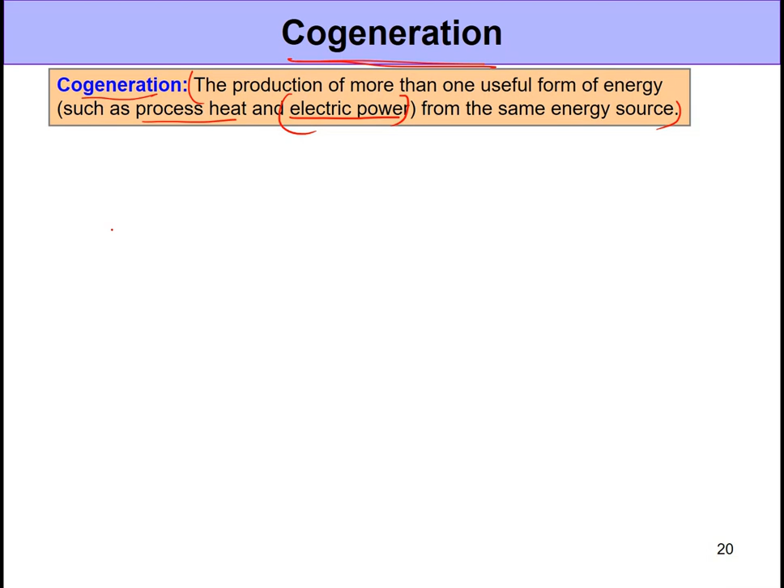So the outputs from the cycle that we're talking about are two: electric power or electricity plus heat, and it's certainly coming from the same energy source. Now, why do we care about that? Let's have a look. If you consider a lot of industries that are around us, a lot of them require energy in the form of heat as well, in addition to, of course, electricity requirements. This is called process heat, simply because it's needed for certain chemical processes, right? Certain food processes as well.

So when you talk about the conditions of the process heat that's used in these industries, it's typically in the range of 150 to 200 degrees Celsius and between 5 to 7 atmospheric pressure. So low to medium temperatures, not very high temperatures. Now, the way the heat is produced in all these industries is actually by burning fuel. Okay, so you're burning fuel, and all you're doing is just producing steam at rather low temperature and using it.

And this is what's done, but it's not a very smart way of using your fuel, right? Because the fuel can burn at 1500 K or even higher, and all you're doing is to heat up water to about 473 K and use it for heating purposes, not anything else. So it's not a very efficient way of making use of the resource, nor is the temperature between the source and the application well matched.

So there could be better options, but yes, a lot of industries still do this because, well, it's a cheaper option. Why not? So now the question is, how can we make this entire thing better from the exergy point of view and also from the economics point of view? It turns out that a lot of industries that require huge amounts of process heat also require large amounts of electric power.

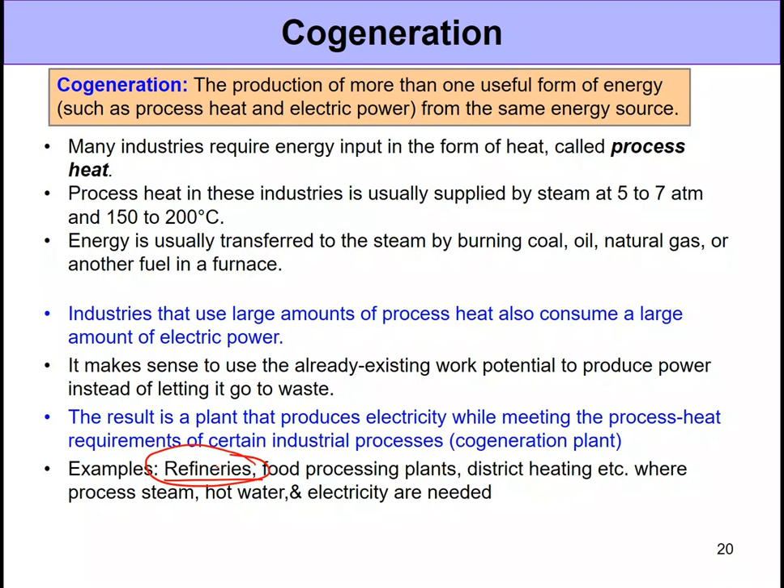Now, when we talk about the industries that fit into this definition of requiring a lot of process heat as well as consuming large amounts of electric power, the industries that come to mind are a lot. Refineries, for one, are one such industry where they're using lots of process heat and lots of electric power. It's for this reason that a lot of Aramco refineries have their own power plant, right? They don't take power from Saudi Electricity Company. They have their own power plant because it's needed for running the refinery itself, and it makes a lot of sense there.

And refineries also need a lot of process heat. They need a lot of steam at these temperatures, 150 to 200 degrees Celsius, for performing a lot of chemical reactions that are needed to improve the fuel or to transform the fuel into the chemicals that are needed, right? Some of you will surely end up in Aramco for your co-op or your summer project, and when you go there, you'll be seeing how they make use of process steam or this process heat in a lot of different chemical processes, right?

Apart from refineries, food processing plants, such as the ones that Almarai has or any other company has, these make use of the process heat. So they don't have their own power plant, but they can have smaller power plants that can provide heat as well. The other option would be district heating, but essentially the point is any place you need hot water plus electricity, this sort of application makes sense.

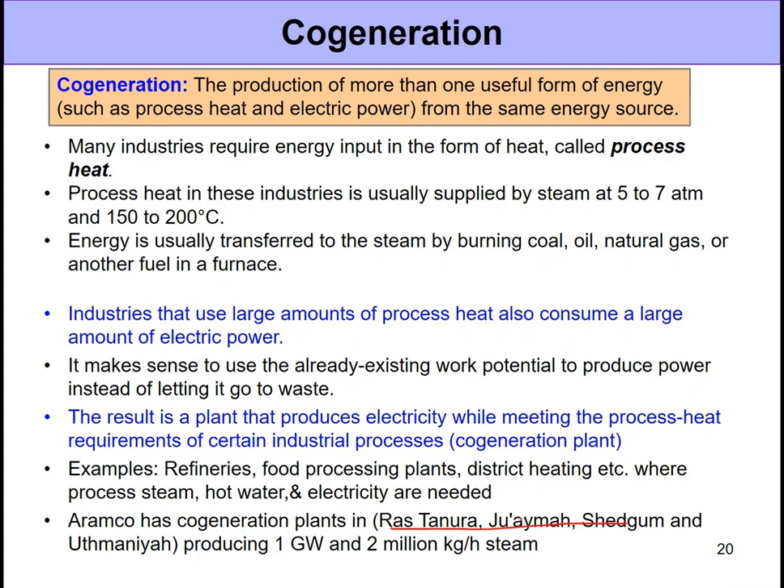Now, to give you more specific examples closer to home, Aramco has more than 3 cogeneration plants within the eastern province. So these are the locations: Ras Tanura, Ju'aymah, Uthmaniyah and Shedgum. And these power plants are actually producing 1 gigawatt power plus 2 million kilogram per hour of steam, right? Pretty huge quantity of steam. And they're using all of this for their chemical reactions, right?

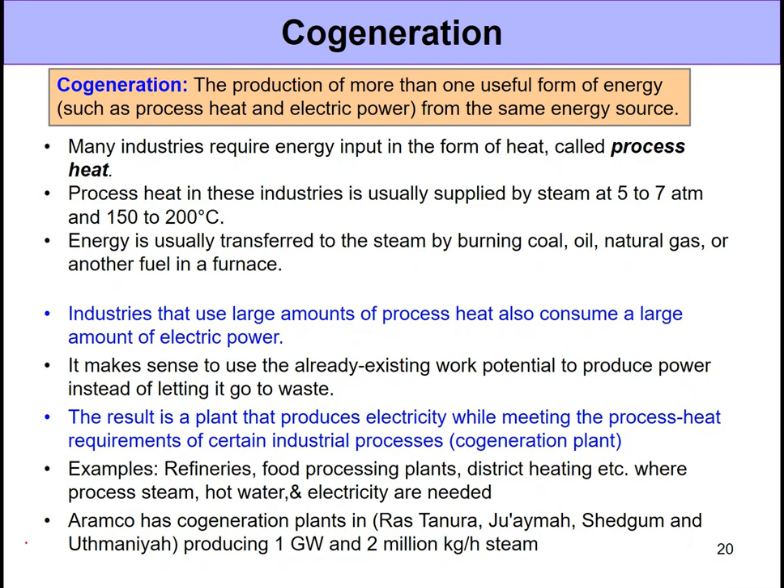We're producing millions of barrels of oil, so certainly you need an equivalent amount of water for producing the stuff. So yes, this is not something that we are just talking about in theory. It's something that's actually there, and it makes a lot of sense from the energy utilization point of view. Now that we have talked a lot about what is there, how it works, and so on, let's look at its schematic and understand what's exactly happening.

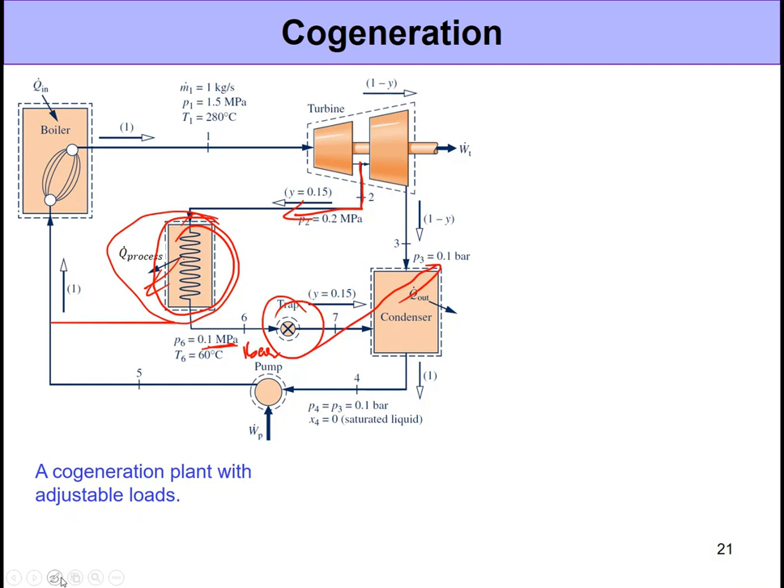Okay, so this is a very flexible operation, right? Depending on what you need, you can play around with the flow rates that you send. So let's say you have certain times when you need a lot of process heat. So instead of sending anything to the second stage, we send everything to the heat exchanger for providing the process heat. That is, we can make y equal to 1.

Now this is one of the common ways in which you're doing it, but you can also have a valve here to send it directly to the heat exchanger without sending it through the turbine, right? Although not commonly used, because it always makes sense to extract some amount of power within the turbine, but you could do that if you want, if the process heat requirement is very high.

Okay, so when you don't send anything through the second stage turbine and send everything through this process heater and let it expand, you're not rejecting any heat in the condenser because you're sort of bypassing the condenser, right? And it's a very efficient way of using the exergy available.

There is another option where sometimes we may not be requiring a lot of process heat, right? It happens from time to time in a given day where your process is done and you don't need process heat for a certain period of time. So there, instead of just sending it through this heat exchanger and wasting the energy, you could just make y equal to 0 and send everything to the second stage turbine and expand it, just like you do in a typical power plant. So multiple options, multiple ways in which you can do it, but essentially it's a very simple concept here.

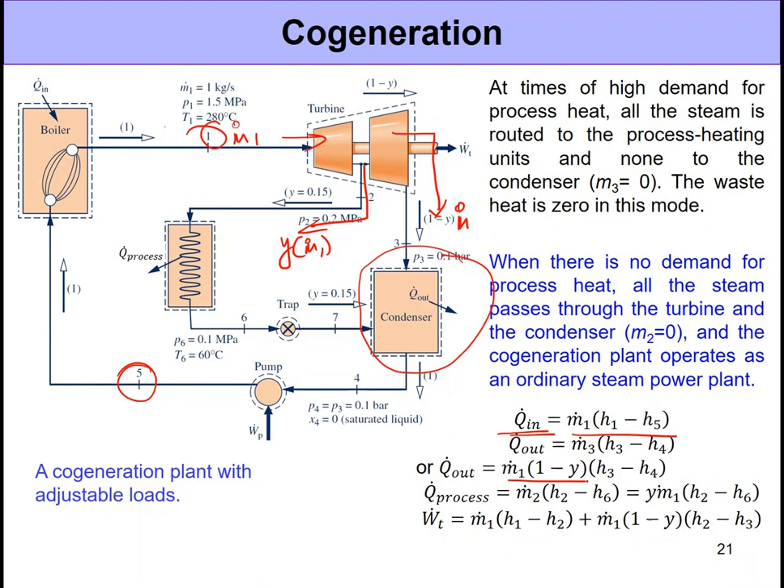Heat output, well, when it's happening within the condenser, we need to be careful about the mass flow rate because it's different. It depends on y. Y could be 0 as well, but depends on y. Okay, so it's m dot 1 times 1 minus y times h3 minus h4. So the difference in enthalpy across the inlet and exit of the condenser, and the mass flow rate associated with it.

Now, the process heat, right? The process heat is simply the mass flow rate associated with it, which is y times m dot 1, times h2 minus h6. And the work done for the turbine would simply be broken down into two: m dot 1 for the first stage and m dot 1 times 1 minus y for the second stage. So as long as you're careful about this, it's a pretty straightforward thing. There's no problem here. All right, questions.

This thing is there in your homework as well, so you might as well ask questions if something is not clear because you have to use this. Okay, no questions. All right, then let's move forward.

Doctor, if it's not ideal, do we use 1 minus y? You mean if it's non-ideal? The expansion within the turbine? The whole process. No. Whether it's ideal or non-ideal, it does not really matter. We will keep using y and 1 minus y. If it's non-ideal, the only thing that will change is the enthalpies at the exit of the turbine, right?

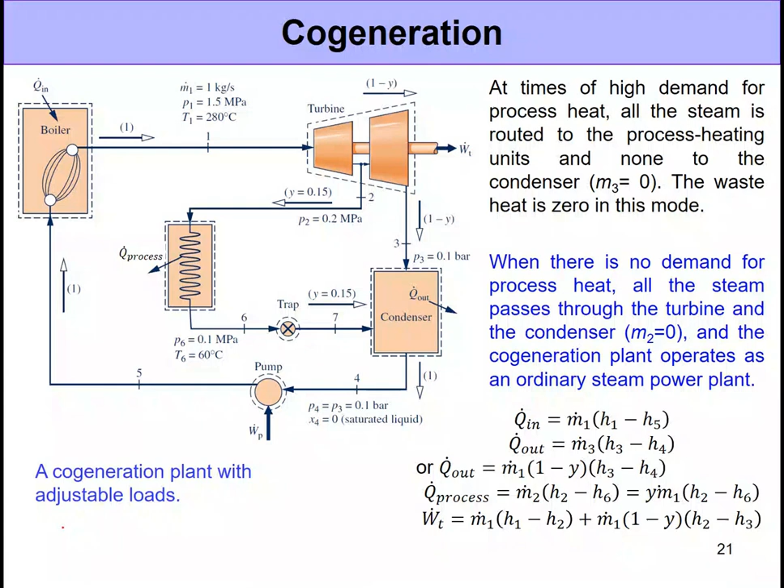All right, so then let's move forward and solve an example on exergetic efficiency and cogeneration. But before that, a quick review of exergy because we're going to make use of it again. This is the exergy balance for a steady-flow system, and this is the formula for specific flow exergy. The reason I'm showing it here is because we're going to solve a problem based on that, and when you do the problem by yourself, you can refer to the slide and have a look on how to make use of that.

So just to remind you, when we are looking for exergetic efficiency calculation for any given component or for the entire system, we make use of the exergy balance equation, and this is the exergy balance equation that we have here. There are some really good examples in your textbook, example 8.7 and 8.8, where the exergetic efficiency is calculated for specific components, like a heat exchanger or turbine and pump. These are similar to what we did in chapter 7, so please make sure to go through them.

In this class, I want to talk about calculating the exergetic efficiency for the entire system. We already covered the individual components in chapter 7. So the other thing I want to talk about now is to remind you about the exergetic efficiency formula when you have a heat engine, right?

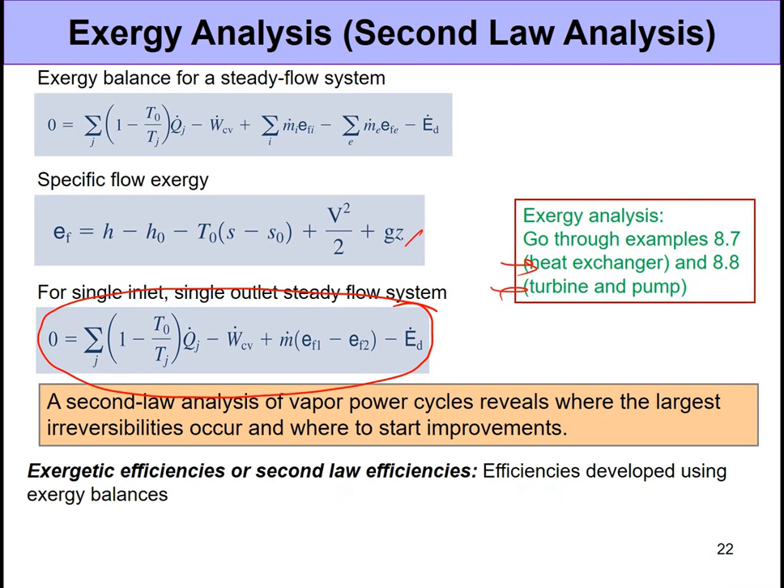So exergetic efficiency, as I said before, is also called the second law efficiency. And when we're dealing with the heat engine, you can calculate exergetic efficiency simply as the ratio of energy-based efficiency divided by the Carnot efficiency. Okay, the Carnot efficiency would simply be a function of the temperatures TH and TL. All right, so this is again something that we discussed before. Just wanted to remind you again.

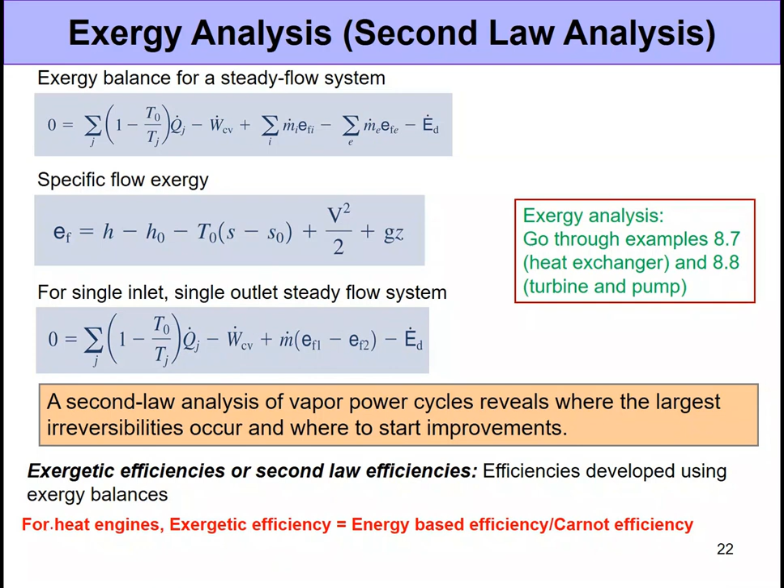And so just wanted to tell you that exergetic efficiency is something that you can get either from exergy balance, or for heat engines, you can get it from this formula. Okay, and why do we care about exergetic efficiency? Well, the simple reason is because we would want to identify where the irreversibilities are and how much exergy is being destroyed, so that we can figure out ways to minimize the exergy destruction wherever it makes economic sense.

Okay, so now let's go ahead and look at this question. So here we are dealing with a cogeneration system. Okay, the Rankine cycle operates with the steam which is entering the turbine at state 1 at these conditions, 55 bar and 370 degrees Celsius. So that's state 1. The condenser pressure, right? This is the condenser here. The condenser pressure is 12.4 bar. The isentropic efficiency of the turbine is given.

Okay, the energy which is rejected by the condensing steam is actually transferred to a separate process stream of water, which is entering at 1 megapascal and 120 degrees Celsius. So this water is entering as compressed liquid, and it exits as saturated vapor at, of course, the same pressure. So we are not rejecting the heat to the environment. We are rejecting the heat in a heat exchanger to another process stream of water that is operating at a different pressure.

So this is certainly a non-contact type of heat exchanger, right? We are having two streams at two different pressures, and it comes in at lower temperature and exits as a saturated vapor at a slightly higher temperature, the Tsat. Okay. Now, for this specific problem, we need to do a couple of things. We need to first determine the mass flow rate for the working fluid. The working fluid is the water here, but here we're talking about the working fluid within the cycle, right?

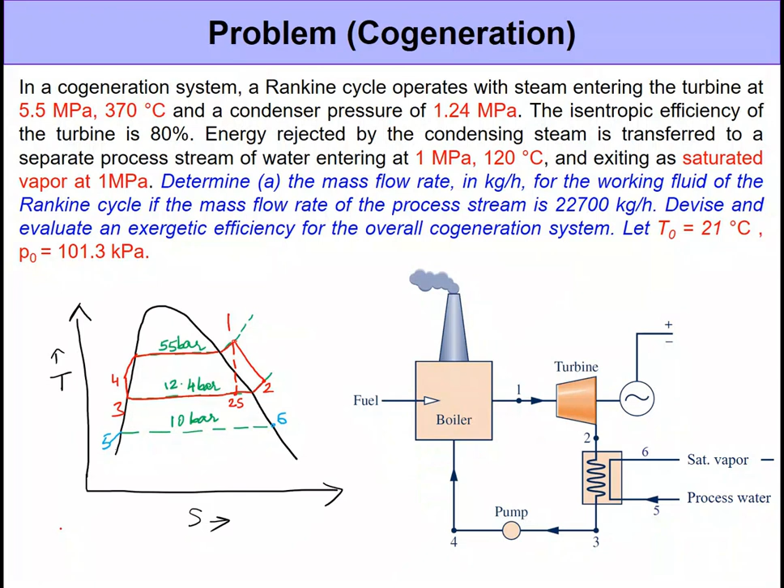Now, before we go ahead and solve for mass flow rates or even the exergetic efficiency, in all these sort of problems, we need to define the states and get the values of enthalpy and entropy. Okay, and that's what we will do first. So this is how the TS diagram looks. And here we are having 2s and 2 simply because the isentropic efficiency is mentioned. So the expansion within the turbine is not isentropic, although the compression within the pump is isentropic, right? Because there's nothing mentioned about the isentropic efficiency of the pump.

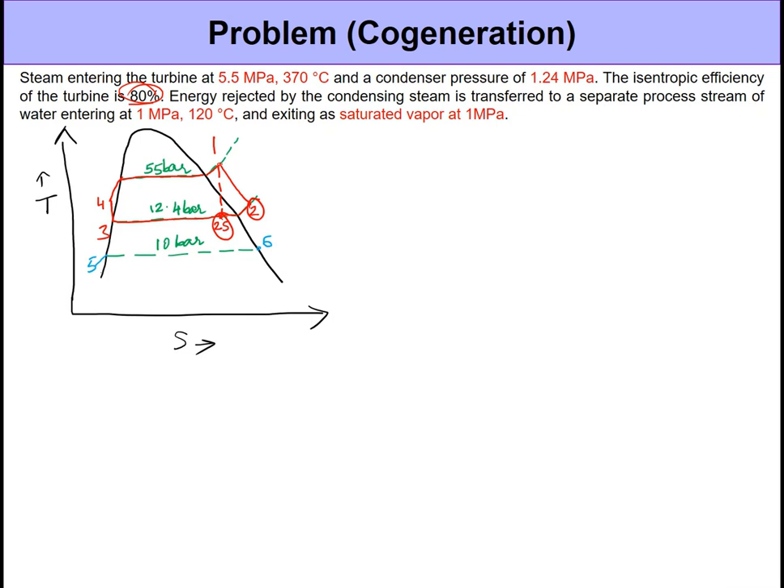Okay, so now let's very quickly look at how we get the enthalpies and entropies at all the different states. We have done this before, so I'm going to go rather quickly. Any questions? Feel free to stop me. So state 1 is easy. We have the pressures and temperatures, get it from the superheated vapor table. For state 2, we got to make use of the isentropic efficiency. Okay, so first of all, what you do for state 2 is you determine the enthalpy at state 2s.

And the way to determine enthalpy at state 2s is pretty straightforward. You have the pressure, and we have the entropy as well. S2s is equal to S1, right? That's what happens in an isentropic process. Now, using this value of S2s, you determine the quality of the mixture at 2s. And using that, you determine the enthalpy H2s. Okay, now this is what you have. This is what we have done before as well.

Now you have H2s, you have H1, and you have the isentropic efficiency given, right? And again, to remind you, the isentropic efficiency for a turbine is simply the actual work output divided by the ideal work output, or the isentropic work output. So we have everything known here. The only thing that's unknown is H2. So you plug in the numbers, and H2 comes out to be 2,838. And if you recall, we mentioned that the enthalpy that comes out here, H2, is always greater than H2s, right?

So that's what you see is the case here as well. It's a quick sanity check to ensure that you're doing the correct calculation and you're putting the things in the right order. OK, so why does H2 have to be greater? Well, the work output is smaller, right? The actual work output is smaller.

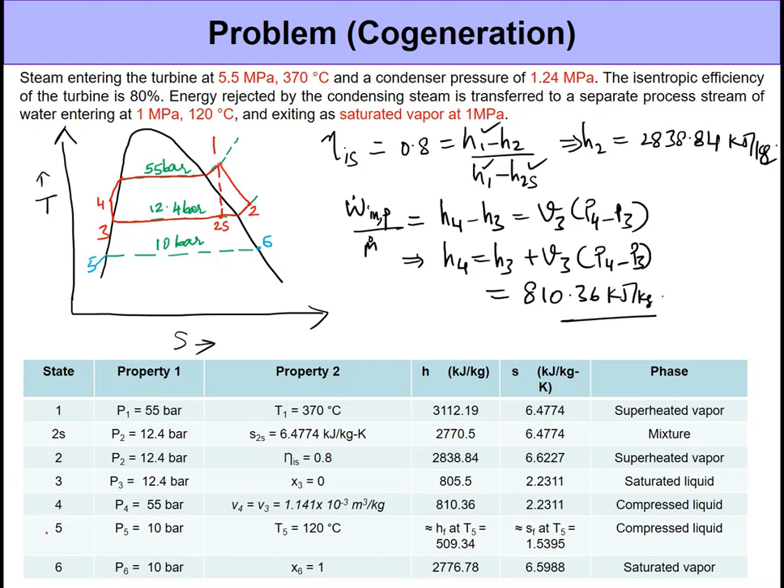In the exam, or even in the classes, if I give you this sort of a question, I'm not going to ask you to determine all the properties in the table. I may give something easy, maybe to determine enthalpy for state 1. Then I may give something like to determine enthalpy at state 2 and maybe state 4, right? Just to make sure that you understand how to do the stuff. But you'll be spending a majority of the time looking at how to make use of it.

OK, so the first thing is we need to determine the mass flow rate of the working fluid within the cycle. Any ideas? How do we determine that mass flow rate? We have the mass flow rate of the process stream. We are having heat exchange: the heat lost during the process 2 to 3 is the heat gained during the process 5 to 6. That's all we are having within the heat exchanger. So how do we get the mass flow rate of this working cycle, the mass flow rate that's going here from 2 to 3?

Energy balance or mass balance? Yep. Energy balance. We don't do mass balance here because the mass is remaining the same in both of the cycles, but excellent. The answer to this question most of the time is energy balance, right? And when the masses are changing, you take mass balance as well. Thank you, Abdul Malik. So you just have to put energy balance here, right?

You can put the energy balance either way. You can write it as the energy lost by the hot fluid is equal to the energy gained by the cold fluid, or you could write it as summation of mi hi equals summation of me he, meaning the mass flow rate and enthalpy coming in has to equal the mass flow rate and enthalpy going out. There are two inlets: state 2 with the mass flow rate of m dot cycle, and state 5 with the mass flow rate of the process stream, which is given. Either way, you end up with the same energy balance equation.

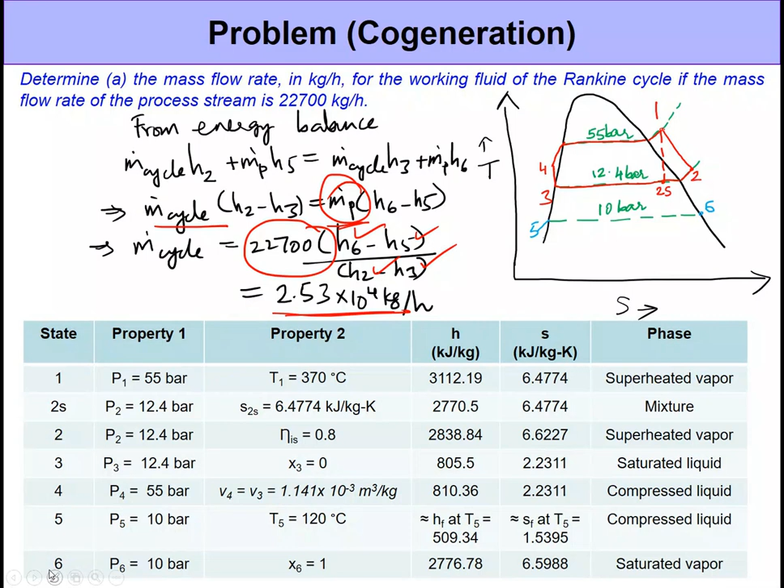And again, as I mentioned before, these are the sort of questions that you can expect, right? Questions which test one concept at a time. All right. This is done. So now let's look at the second part, which is to evaluate the exergetic efficiency for this overall system.

Till now we have been looking at the exergetic efficiency for the compressor, for a pump, for a turbine, and so on. We have not looked at the exergetic efficiency for the entire system. The way we solve it is pretty similar, as we'll find out in the next few minutes. You just have to remember the exergetic efficiency formula: the exergetic efficiency is simply desired output by required input.

And here you've got to be careful in figuring out what is the output, what is the input, and everything needs to be written in terms of exergy changes, right? And you get the exergy changes simply from the exergy balance equation that you have. So here we're not looking at each component, we're looking at the entire cycle.

When you look at the entire cogeneration system, the desired output that you're getting here is the net work output that we obtain from the turbine, plus the exergy transfer that's happening to the process stream, which is happening here in this heat exchanger or in the condenser.

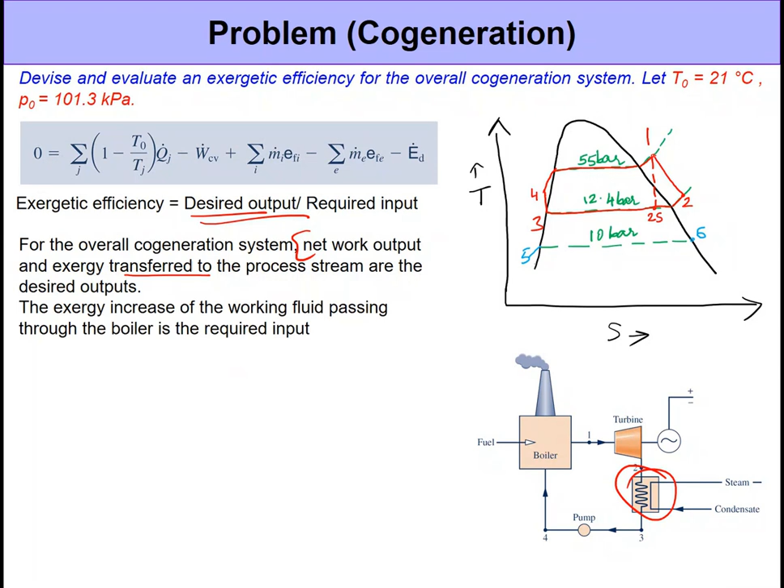Now, for this desired output, which consists of two different things, work plus heat transfer, we need to provide some input, and the input is simply the exergy increase within the boiler, right? We need to heat up the fluid. So that's the simple exergy input that we are providing. All right, sorry. So coming back to this,

we certainly expect there to be some difference between the exergy input and the overall exergy output, simply because there will be some irreversibilities, and that is the exergy destruction. So the question is, what is the exergetic efficiency here? How high is it? Here we just need to write the net rate of exergy output, which is coming from the net work output of the cycle, plus the exergy increase of the cold fluid.

So we've got to be careful to make use of the exergy increase for the process stream and not use the exergy decrease of the hot stream, because those two values could be different. The energy balance works out, but the exergy is not balanced. So you've got to be careful about this. Same way, the input is just the exergy input to the cycle, happening within the boiler between stage 1 to 4.

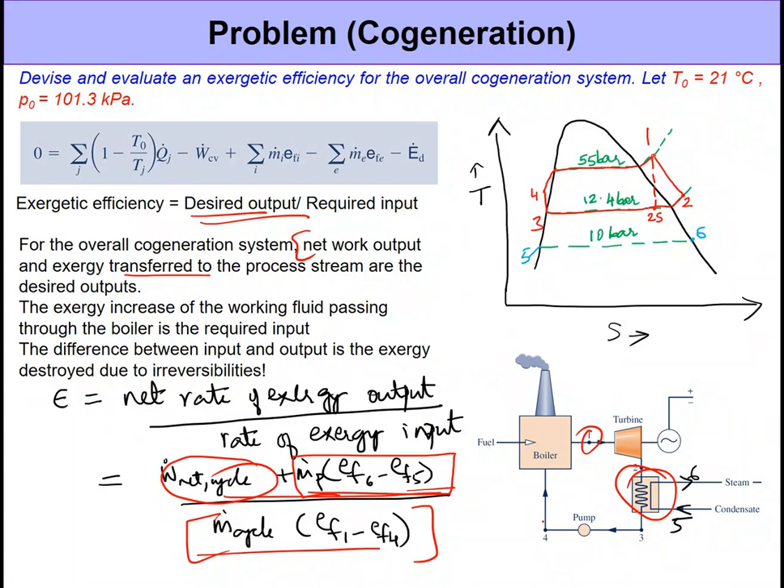Now, the net work output of the cycle is simply turbine work minus pump work, and it's something that you can easily determine. We have all the 4 enthalpies, we have the mass flow rate of the cycle, so it comes out pretty easily in this manner. Now, the other thing that we need is the change in exergies, which are also easy to determine once you have the enthalpies and the entropies.

We picked up these entropies directly from the table. So we have the enthalpies and entropies for all the 4 states, just a matter of plugging the numbers into this formula, and you get the exergy changes for both the process stream and the working fluid. Once you plug in the numbers, be careful to use the correct mass flow rates. This is the mass flow rate of the process stream. This is the mass flow rate of the working fluid.

Once you make use of the correct mass flow rates and correct changes in exergy, the exergetic efficiency comes out to be almost 92%. It's pretty high, simply because we're making use of almost all the exergy available. There is some amount of exergy destruction, but from an energy balance point of view, the energy efficiency would be even higher than this. Okay, so that's about it.